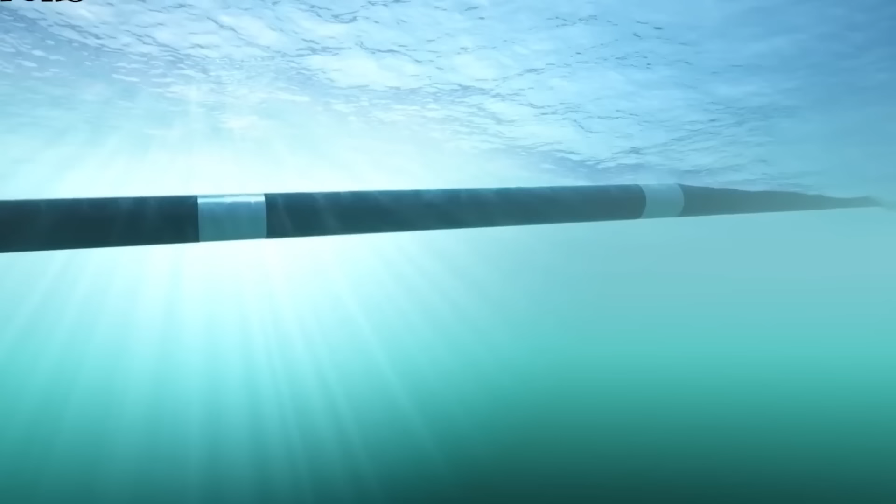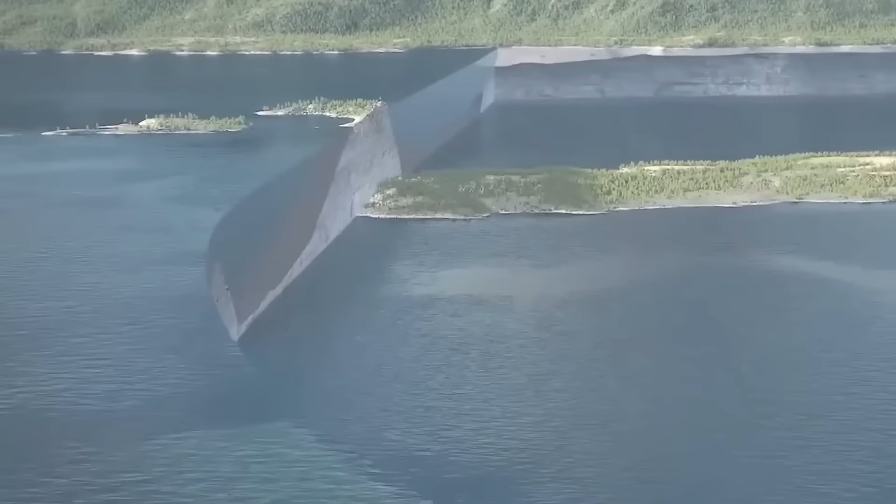Imagine stepping onto a train and gliding beneath the ocean, racing at over 250 kilometers per hour inside a tunnel longer than most cities and deeper than you'd ever dare to dive. This isn't a science fiction fantasy. It's China's newest mega project, the Jintang Undersea Tunnel, a project so audacious, so extreme, that many say Americans can't even imagine building something on this scale.

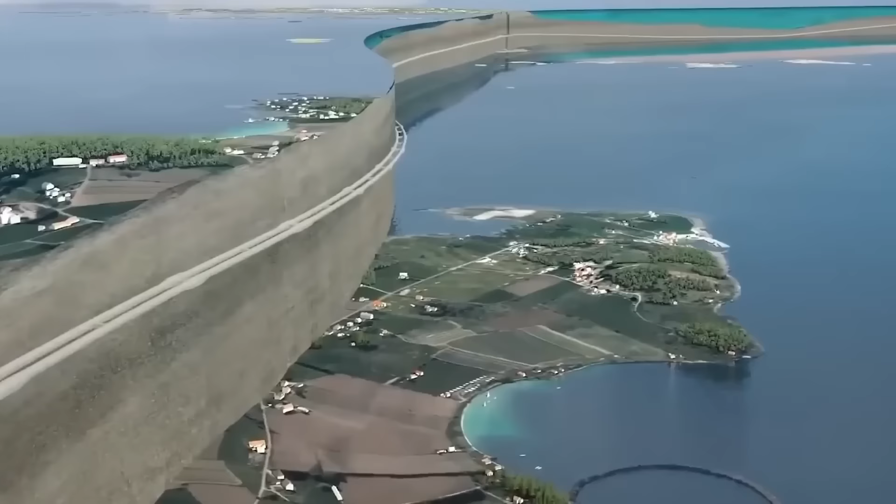China has been called the world's infrastructure maniac, not as an insult, but as a recognition of its unmatched ability to build big, fast, and bold. While many countries debate projects for decades, China just gets them done. In the past 20 years alone, China has built the largest dam in the world, the biggest water diversion project in history, and a high-speed rail system longer than the rest of the world combined.

Now it's attempting something few thought possible, creating the world's longest high-speed rail undersea tunnel. The Jintang Tunnel will stretch more than 16 kilometers, with over 11 kilometers directly beneath the seabed.

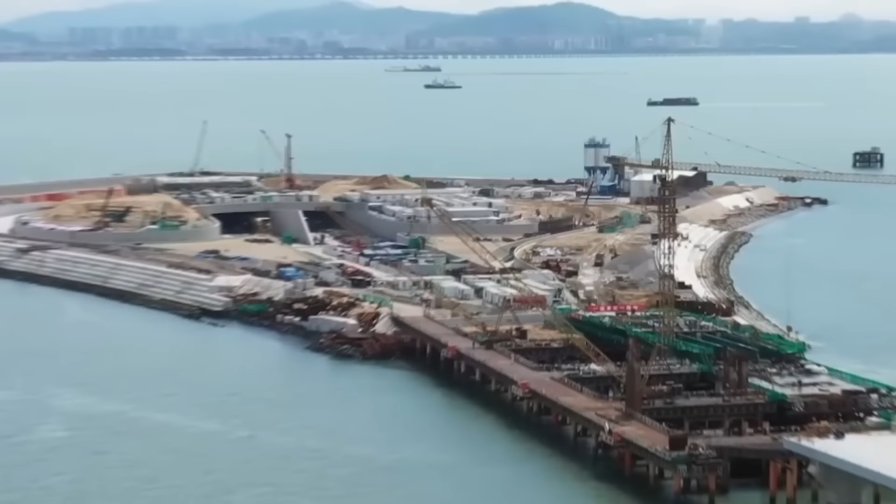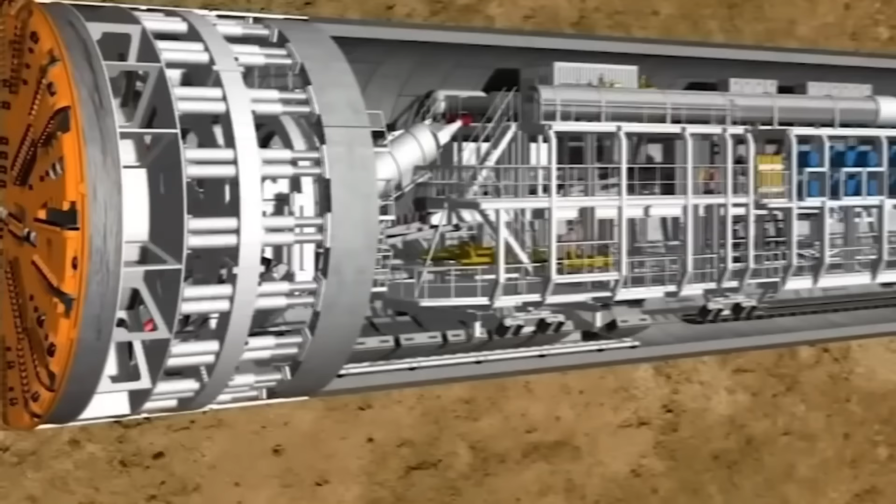To put this in perspective, the UK-France Channel Tunnel is 50 kilometers long, but trains there run at only 160 kilometers per hour. Japan's Seikan Tunnel? About 54 kilometers, but trains are limited to 140 kilometers per hour due to safety issues. The Jintang Tunnel will be shorter, yes, but far more extreme, designed to carry high-speed trains at 250 kilometers per hour under crushing ocean pressure.

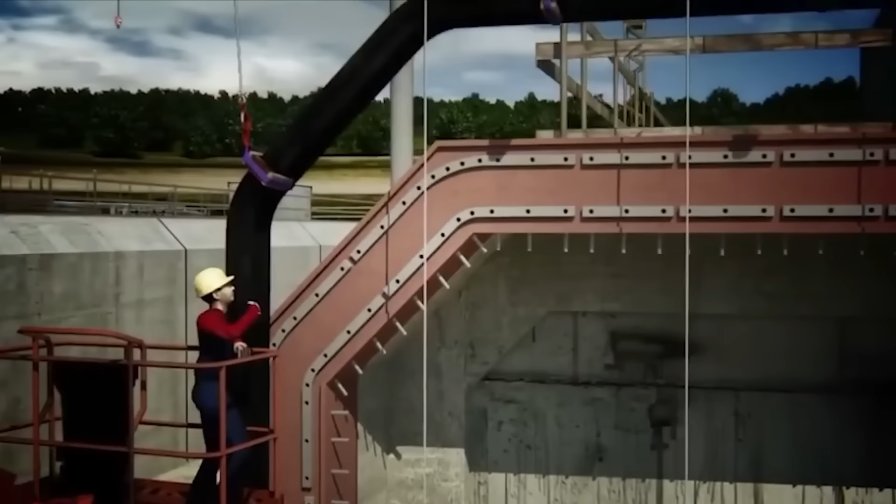Now, let's step into the engineering battlefield beneath the sea. Building this tunnel isn't as simple as drilling through rock. Along its path, the Jintang Line must cut through 28 geological transitions, shifting from hard rock to clay to loose sand. For most countries, this would be a nightmare. For China's engineers, it's a challenge to conquer.

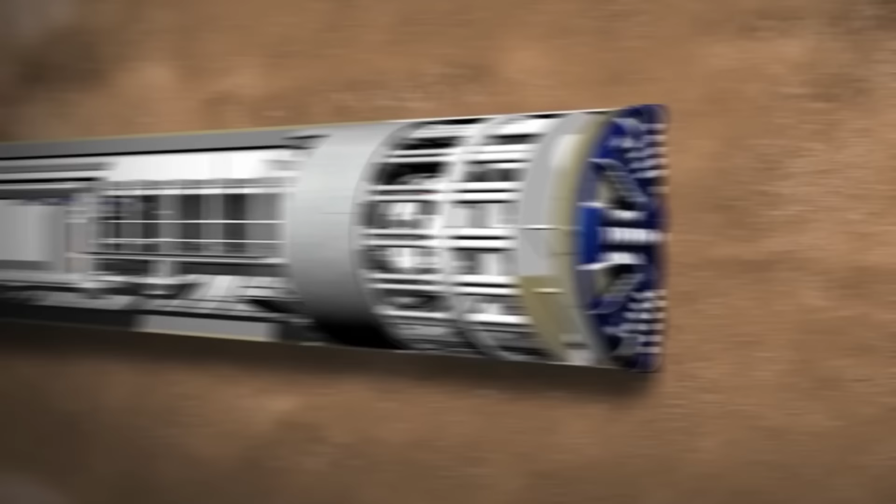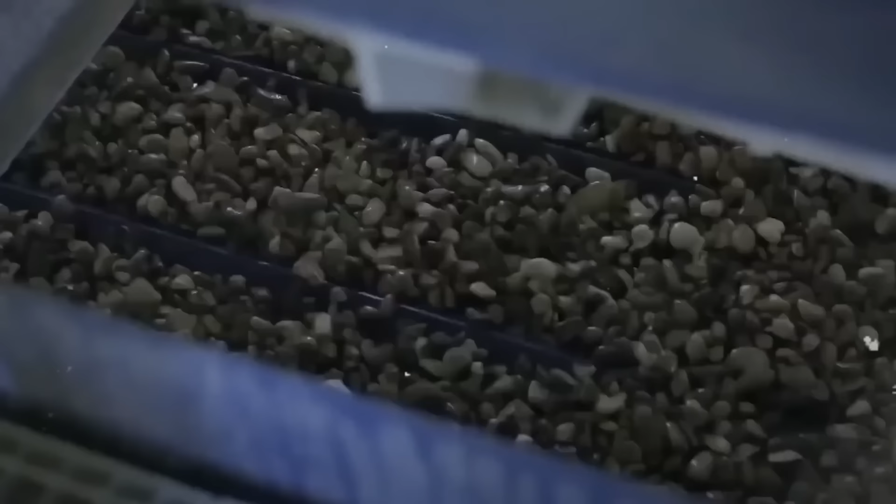To do this, they've deployed two colossal tunnel boring machines, or TBMs, nicknamed Zhuhai and Yongzhou. Imagine steel beasts the size of skyscrapers lying flat. Their rotating cutter heads are as wide as a 5-story building. Each blade is sharp enough to slice through rock and powerful enough to grind through seabed soil. These machines don't just dig, they fight their way forward, holding back the sea with layers of reinforced steel and precision engineering.

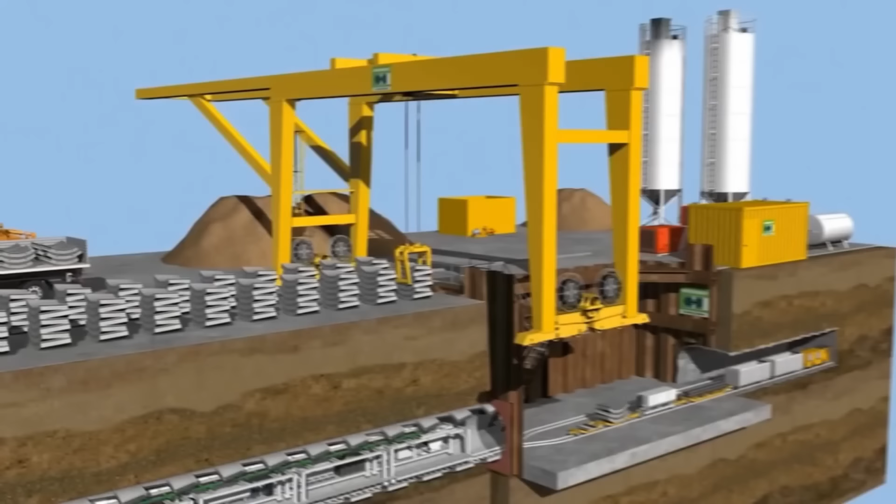And here's the breathtaking part. Zhuhai and Yongzhou aren't just digging blindly. They're guided by China's BeiDou satellite navigation system, correcting their path in real time. By the time they meet under the seabed, the alignment error must be no more than a few centimeters. Imagine two people digging tunnels toward each other from opposite sides of a mountain. If they miss by even a meter, the entire project fails. That's the level of accuracy required here, except with thousands of tons of machinery under ocean pressure.

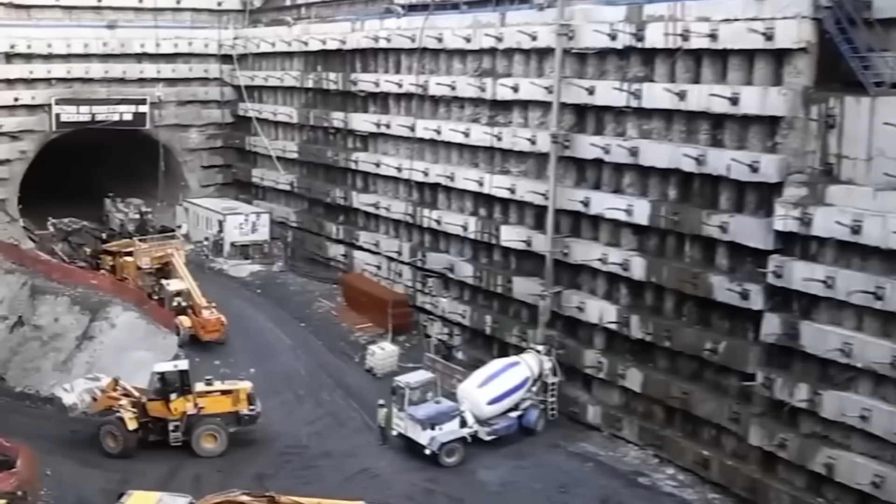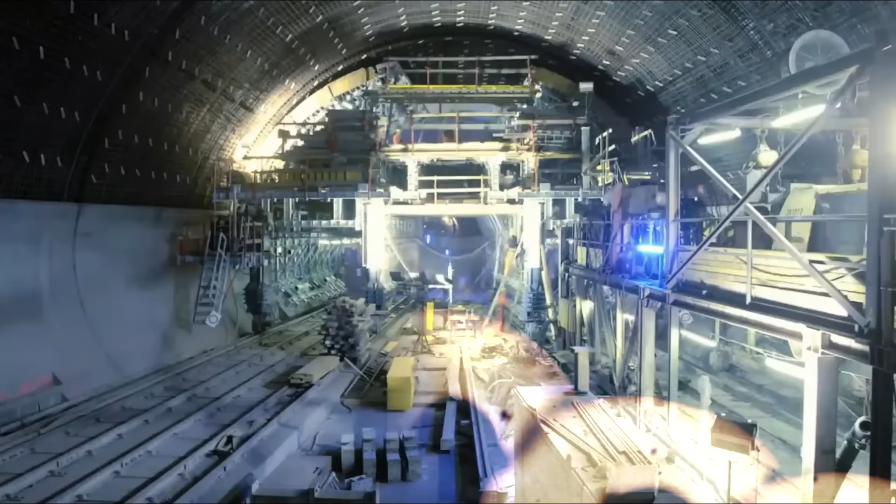At 78 meters below sea level, the tunnel is under extreme pressure. Every square meter of its surface carries nearly 8 tons of force from the ocean above. That's like parking a fully loaded truck on top of a single sheet of glass. If even a hairline crack appears, seawater could rush in with the force of a jet engine, flooding the chamber within seconds. There is no room for mistakes.

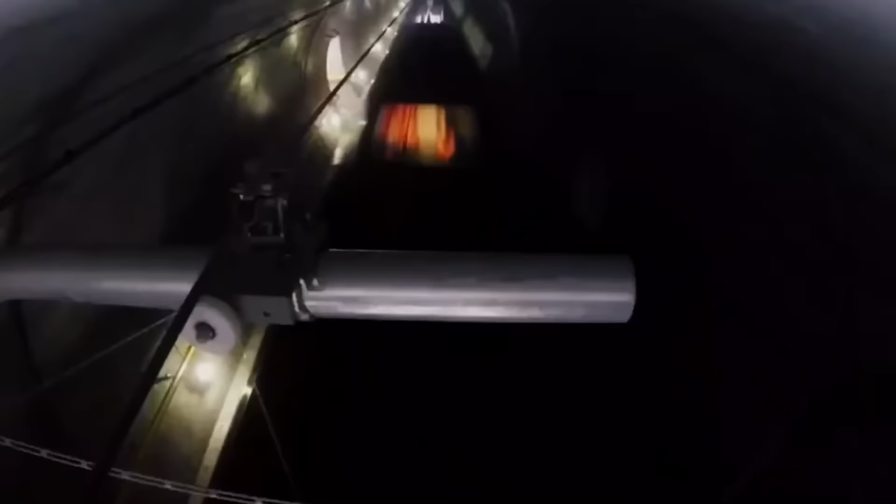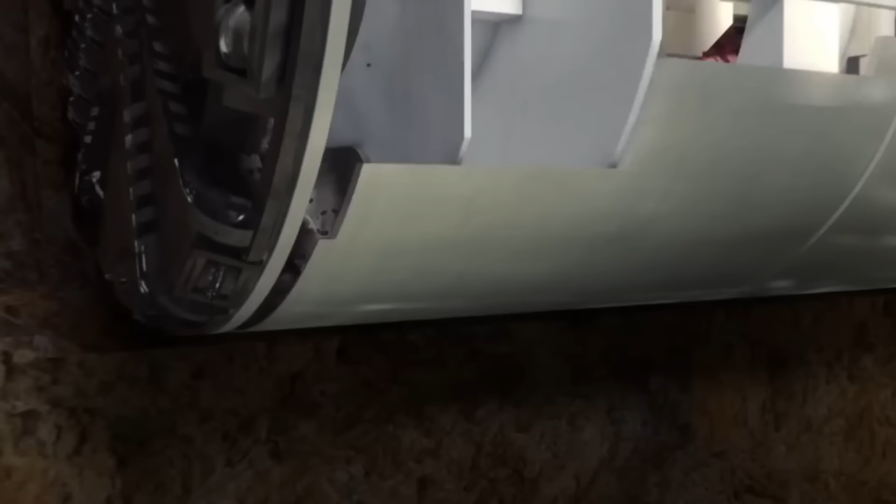The biggest threat comes from two things: seawater infiltration. Saltwater corrodes steel, eats into concrete, and if left unchecked, can weaken the structure within years. Geological instability: tunneling through mixed layers of clay, sand, and rock creates unpredictable shifts. Imagine drilling into butter, then suddenly hitting granite, and then sinking into wet mud, all while holding back millions of liters of seawater.

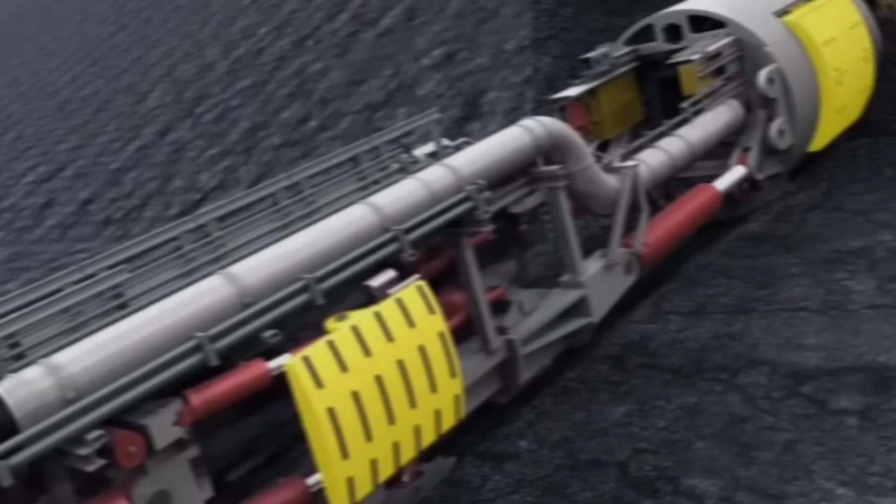To deal with these dangers, engineers turned the tunnel boring machines into something close to a submarine on steroids. The seals around the cutter head were reinforced with multi-layer pressure barriers that prevent leaks even if one layer fails. They installed active water injection systems at the cutting face. When sticky clay threatens to jam the massive blades, the system sprays water to lubricate and soften the soil, keeping the cutter head turning smoothly. Without this, the entire machine could lock up underground, leaving no way to dig it out.

The drive system, essentially the engine that powers the boring machine, was also upgraded. In normal tunnels, consistent soil makes for smooth progress. But here, the constant switch between rock and mud means uneven resistance.

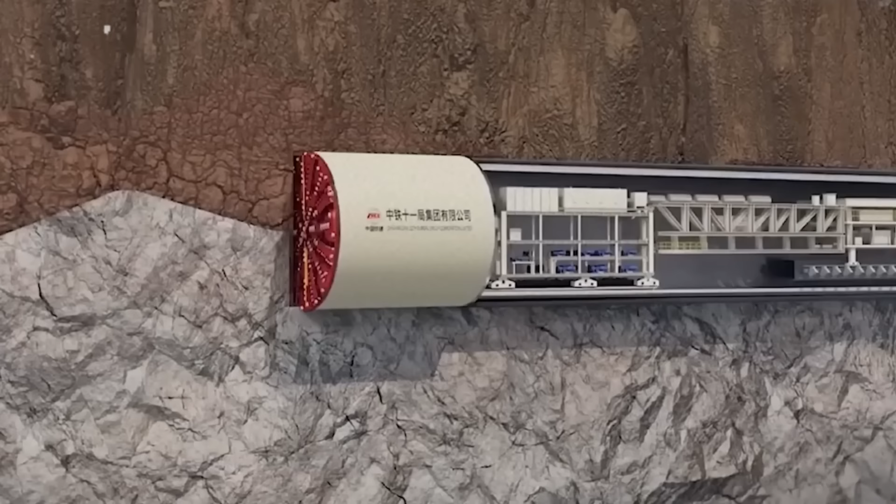To avoid breakdowns, the drive was designed with adaptive torque control, letting it deliver bursts of power when the cutter hits rock, but easing off when it moves into softer soil. This reduces strain on the system and prevents catastrophic failure.

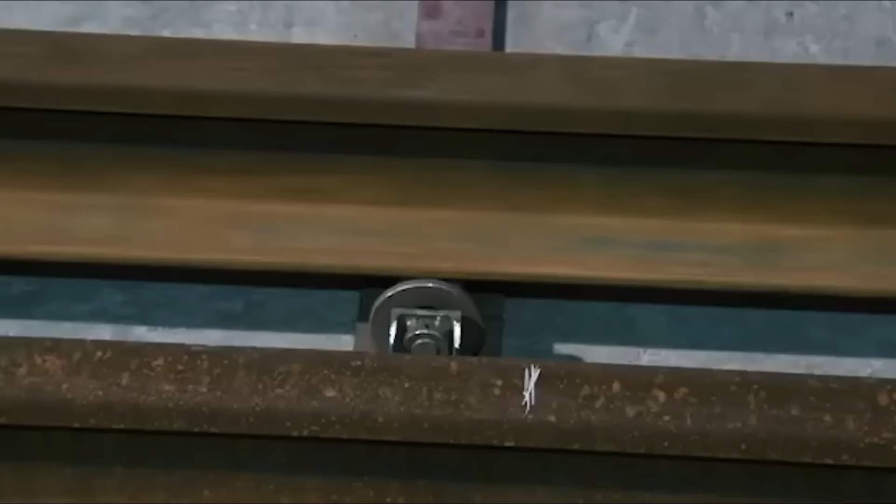And then there's the human element. Working conditions are so harsh that crews can't spend long shifts inside. Specialized ventilation systems pump in fresh air, control humidity, and maintain safe pressure levels to protect workers from sickness or fatigue. Every time a worker enters the tunnel, they know they are one mistake away from disaster.

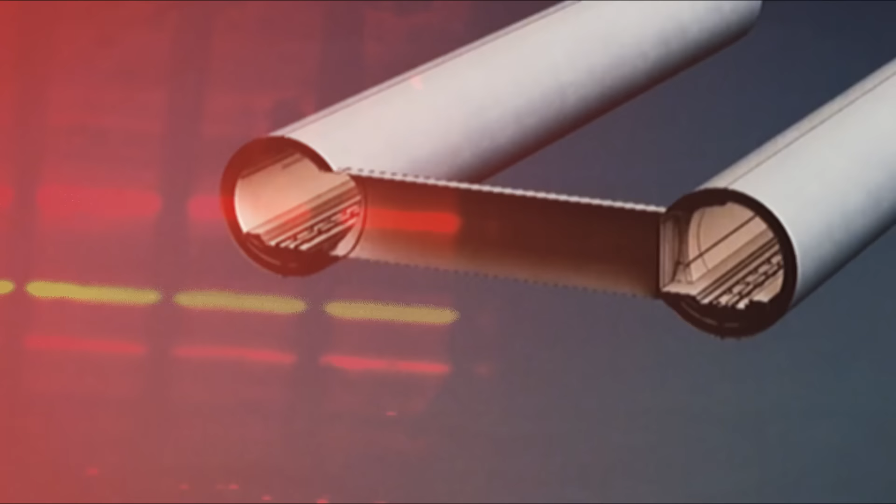But that's exactly why the systems are designed with redundancy, backup power supplies, and emergency pumps capable of draining thousands of tons of water in minutes. In short, the Jintang Tunnel isn't just being carved through the seabed, it's being defended against the sea itself. Every meter forward is a battle with nature, and the fact that progress continues is proof of how far tunnel engineering has evolved.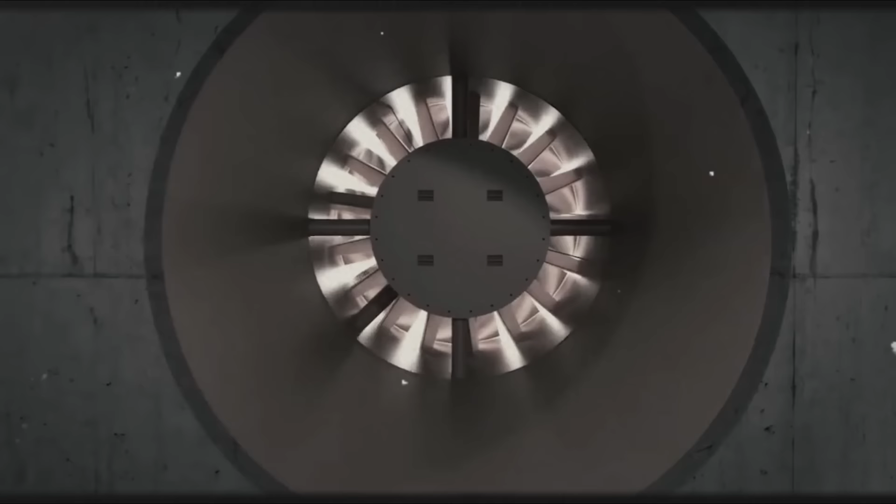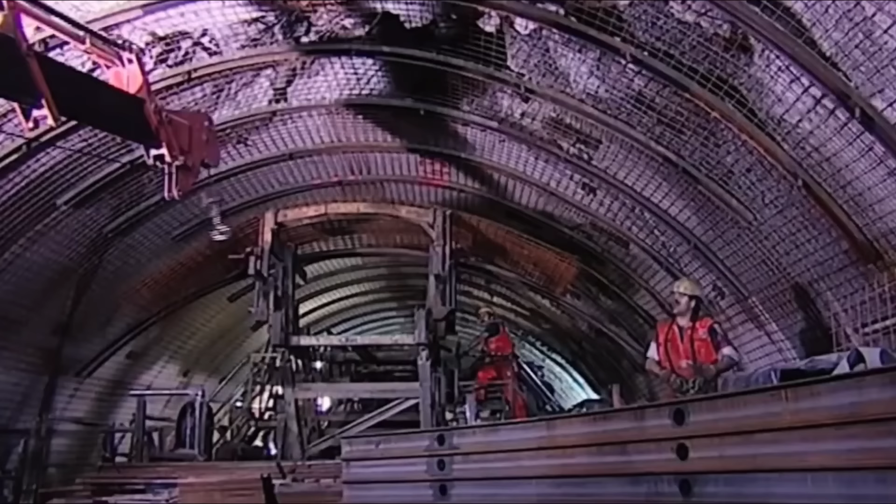But what happens when the machines finally meet underground? There's no exit waiting for them, no way to pull them out. The solution is almost poetic. Engineers shed the shell. The machines are dismantled piece by piece, leaving their massive steel casings behind, buried in the tunnel forever. Like skeletons of titans, silently reinforcing the very walls they created.

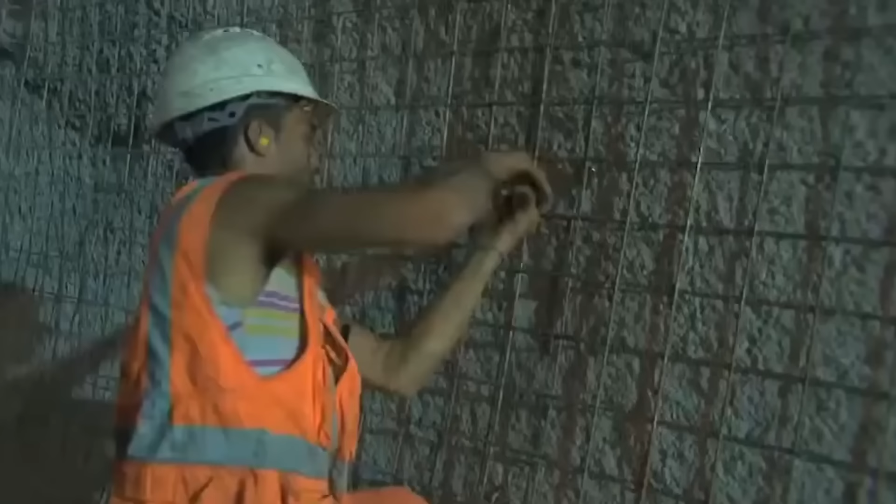When the Jintang Tunnel opens in 2028, it will link Ningbo to Zhoushan in just 30 minutes. That's not just a shorter commute, it's a complete transformation. Zhoushan, once a chain of isolated islands, will become fully connected to China's high-speed rail grid. This means faster trade, a stronger fishing industry, a busier cargo port, and direct access to one of Asia's largest petrochemical hubs.

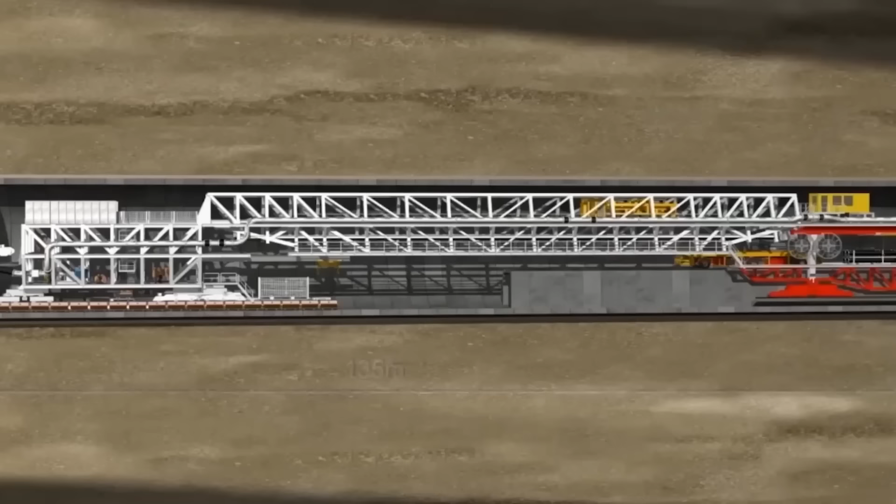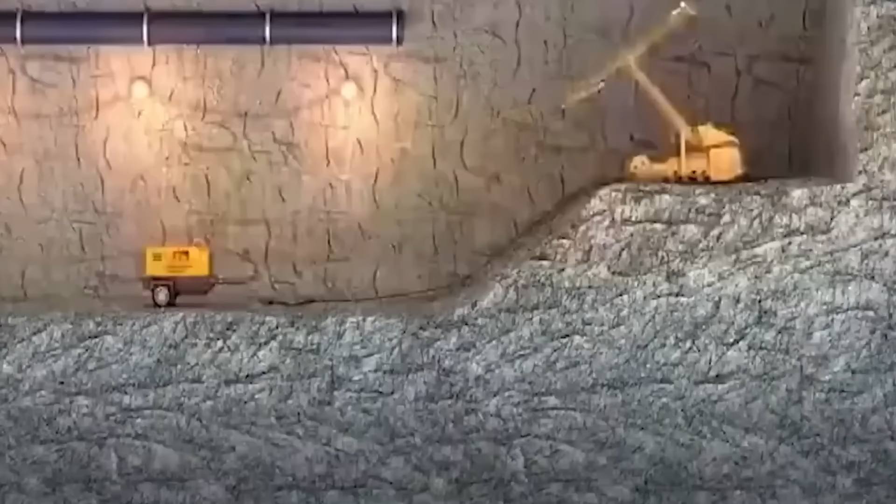But here's where things get really interesting. Many experts believe the Jintang Tunnel is more than just infrastructure. It's a test run for something far bigger, a potential tunnel across the Taiwan Strait. At more than 130 kilometers wide, that would be the most ambitious undersea tunnel ever attempted in human history. If Jintang proves successful, it becomes the rehearsal for a project that could redefine geopolitics.

Not just engineering. China isn't new to underwater tunnels. The Hong Kong-Zhuhai-Macau Bridge project already includes a 6.7-kilometer undersea tunnel built with immersed tube technology. In that project, each tunnel section was the size of an aircraft carrier, weighing 76,000 tons. Engineers lowered them into the seabed with millimeter precision. That project alone consumed enough steel and concrete to build multiple Burj Khalifa towers. Jintang, however, pushes into uncharted territory by combining high-speed rail with extreme depth and pressure.

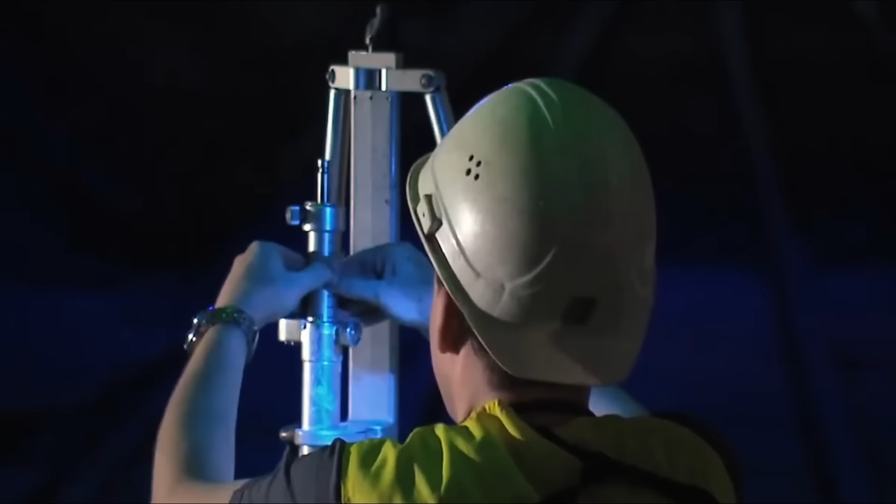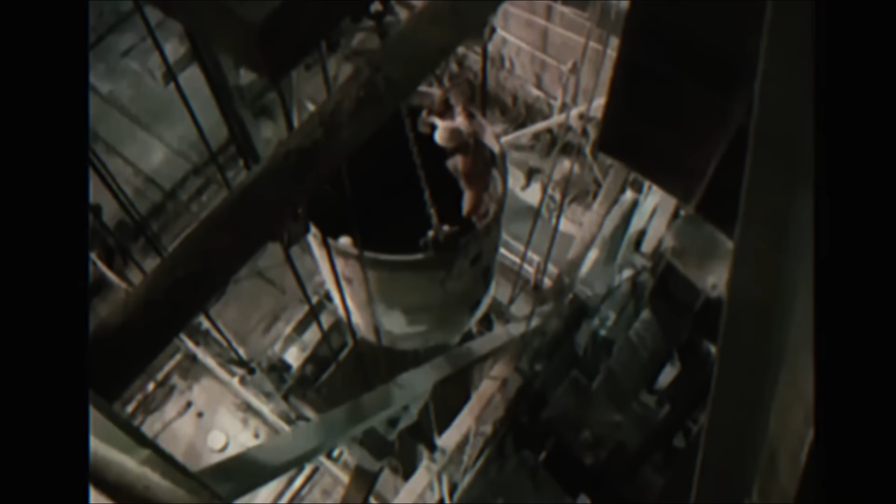Of course, these projects don't come without cost. Behind the glowing headlines, critics point to the hidden price: massive land acquisition, displacement of communities, and irreversible environmental damage. The Three Gorges Dam displaced more than 1 million people and forever changed the flow of the Yangtze River. Projects like Jintang also raise questions about sustainability, debt, and the long-term impact on fragile marine ecosystems.

And yet, for China, these risks are secondary to the rewards. Infrastructure is not just about roads and tunnels. It's about national pride, global influence, and the belief that progress is something you build with your own hands. Every bridge, every railway, every tunnel becomes part of a bigger story: China's rise as an engineering superpower.

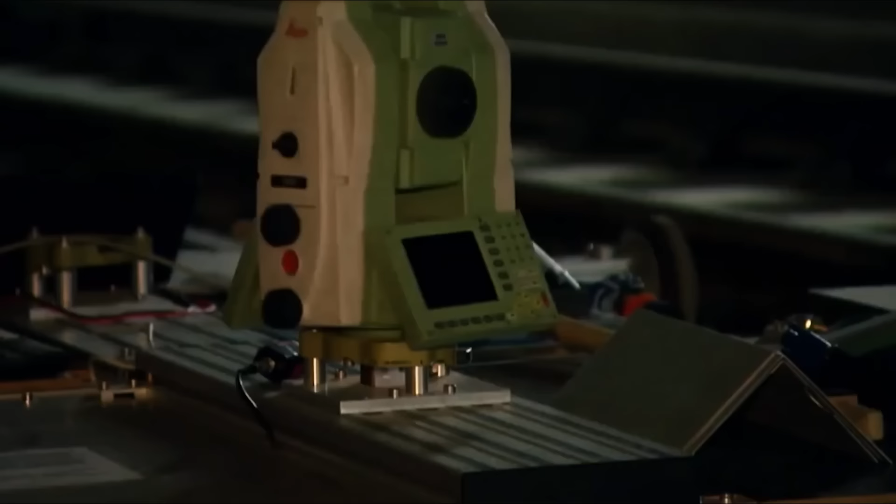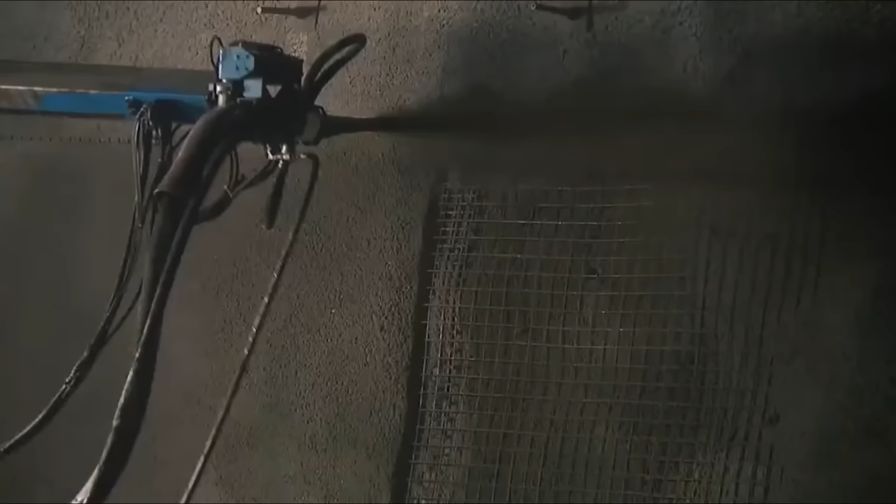So what should we make of the Jintang Tunnel? On one hand, it's a breathtaking display of human capability, a project that pushes technology to its limits and proves what's possible when ambition meets determination. On the other hand, it serves as a reminder that mega projects come with significant costs, often borne by those whose voices are rarely heard.

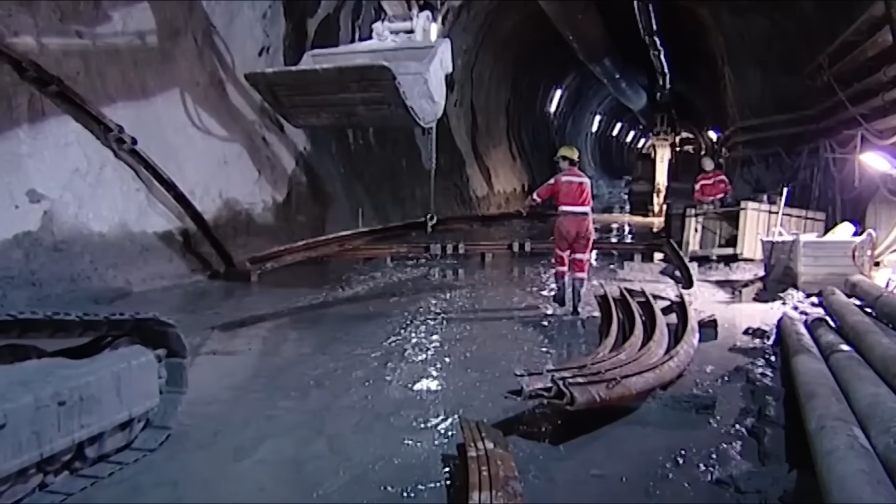But one thing is undeniable. Projects like the Jintang Tunnel are redefining the future. They show us that the boundaries of engineering are not set in stone. They're waiting to be pushed, deeper, faster, and bolder than ever before. The question now is not whether China can build it, but how far it's willing to go next.